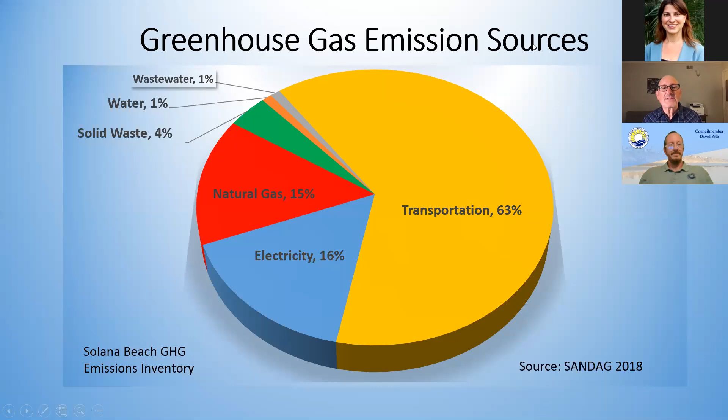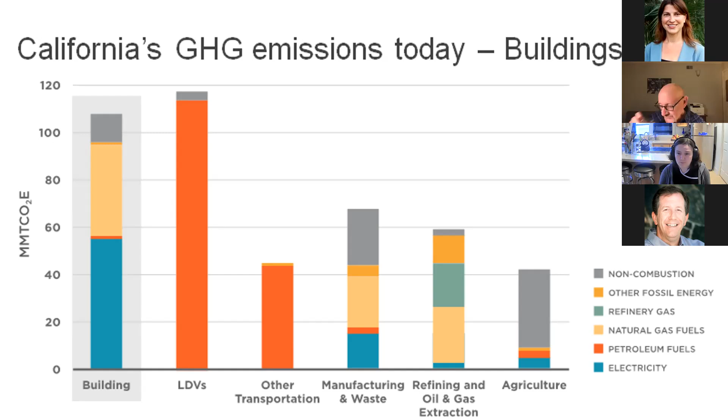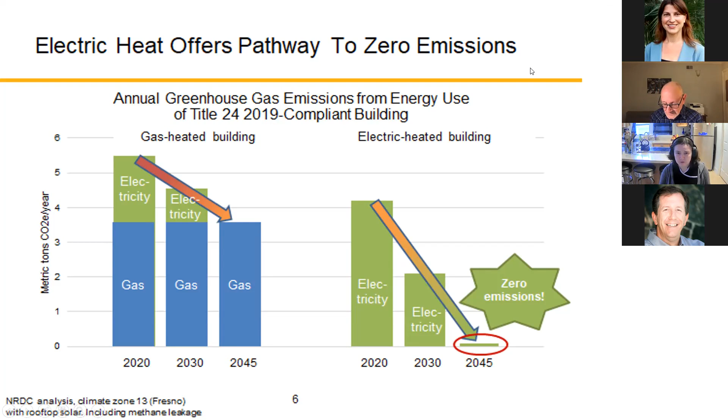I know that there has been some conversation about the opportunity for cleaning up gas, and my next slide is actually intended to talk about that just briefly to give you some context about biogas in particular, or what is also called renewable natural gas. I just wanted to address this, and I'm sure there will be questions as well, but there are some interesting technological fixes for the cleanliness of the natural gas system.

But unfortunately, just in terms of sheer amount of supply, there is not nearly enough to address today's demand. As you can see, if we were to swap out renewable natural gas for our natural gas, we would end up with less than 13% of our total demand. And even with switching out to higher efficiency gas appliances, we just don't have enough of it in state to really fulfill that need. So we generally suggest that we save that renewable natural gas for industries that are hard to electrify. And buildings, as you'll quickly learn here, are not one of those, especially for residential buildings in particular.

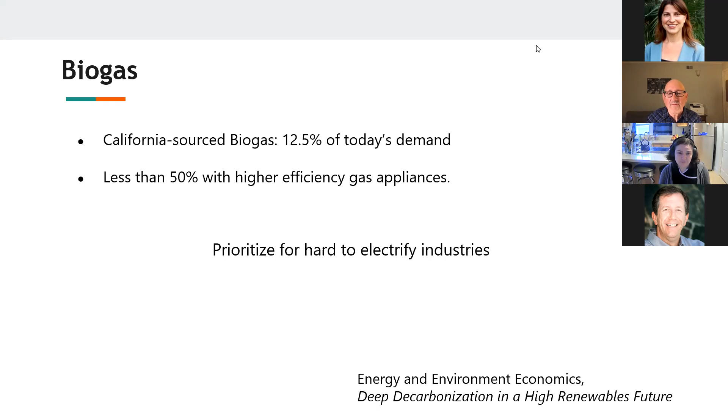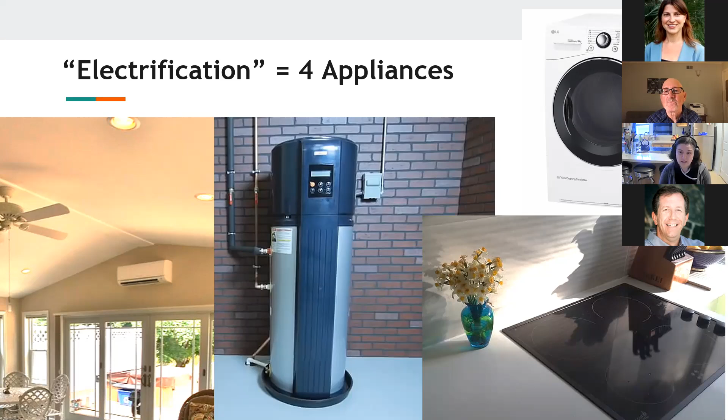So when I talk about building electrification, it really comes down to 4 major appliances in residential applications. Everything I'm talking about here mostly relates to new construction, just to be clear. It doesn't mean you can't take action in existing homes today, but the target for most of our efforts is around new construction, at least for this conversation. And those 4 appliances are your dryer, your water heater, your furnace or air conditioning unit—this device on the far left here is a heat pump, and it does both heat and cool—and then cooking. So those are really the primary targets when we talk about building electrification, and Nick will be diving into some more detail about each of those.

So what are the benefits of this zero emission building, or this building electrification? There's lots, which is part of the challenge when we talk about this—it's multifaceted. They are definitely cheaper to build, which is why the focus on new construction, and for most people they're cheaper to operate as well. They're healthier, more climate friendly, which is certainly the framework that seems most important to Solana Beach, but safety matters too. So all of those are benefits around electrification.

So to talk for a moment about affordability, there's a couple of elements to this. Most prominently in new construction, the avoidance of installing the natural gas piping to a new home, and especially to a new development, can save quite a bit of initial construction costs because you're avoiding that piping altogether. We have a range here as presented from a couple of different studies of how much that can save in initial construction, $1,500 to $6,000 in cost.

And then residents over the course of a 20-year life cycle are also showing a cost savings, even before solar, which in new construction in the state of California is required. So that further lowers the bill over the life cycle of a new building. And then, as kind of an added bonus, it protects against what we're expecting will be large increases in price for the gas delivered to your homes. We're already seeing approved rate hikes across the board from various gas utilities, and they're on track to be 3 times faster growth in the natural gas pricing sector.

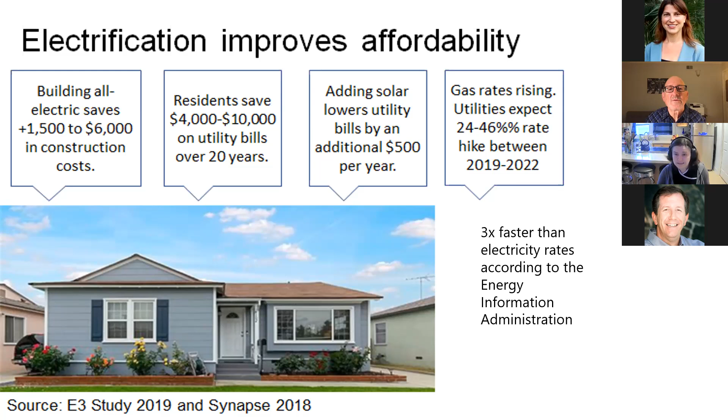And then talking about the outside air as well, the air quality is absolutely impacted by burning gas in homes, which is one thing that completely startled me when I first read it: light duty vehicles are actually on par in terms of their contribution to outdoor air quality with buildings. It's very close compared to power plants, simply because even our natural gas burning plants are so much cleaner—they are pretty highly regulated, and there are fewer of them, so it's easier to regulate them.

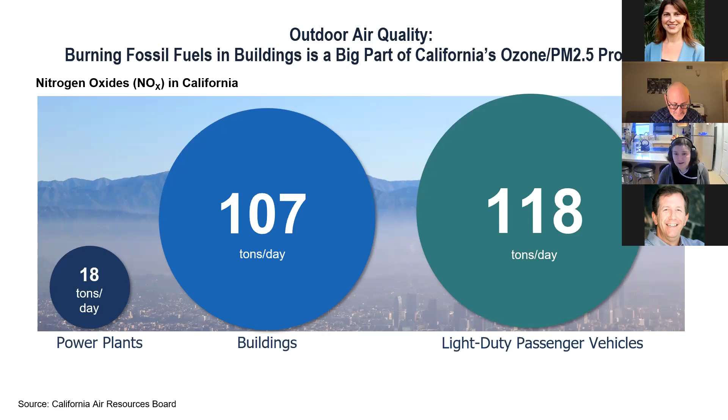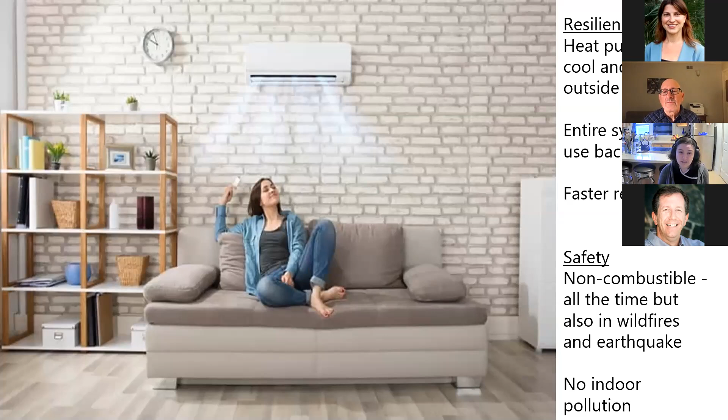And then I don't think we can talk about electricity these days without talking about resiliency. This is just a really important part of the equation, and so a couple of things I'll say about this. One of the things I think about with electric homes is around the ability to back up the whole system with some sort of battery bank, or eventually our cars or something of this nature, and be able to someday have full backup power in the event of short-term power outages, PSPS and otherwise.

Hopefully power outages will be less common in coming days as we harden our electric grid and build resiliency. But there's also other reasons the power might go out. Believe it or not, electricity is faster to restart than the natural gas system. In an earthquake, you're looking at weeks for gas systems to come back up, as opposed to just a couple of days.

One thing to point out from a resiliency perspective: all modern appliances use electricity to start. Some of you may have a pilot light in your water heater at home, so you can have hot water if electricity is out. That's not the case for new construction because pilot lights don't exist anymore—they're all electric starts for safety reasons. So there's no real benefit to having gas in the home during a power outage anymore.

The exception is the gas stove. However, because the fan and ventilation are important for health reasons, you can't run that when electricity is out. So it's a bit of a challenge—we don't want you running a generator in your home without ventilation. Not to mention safety, and the combustibility of gas remains a problem. We can talk about some technologies related to that as well.

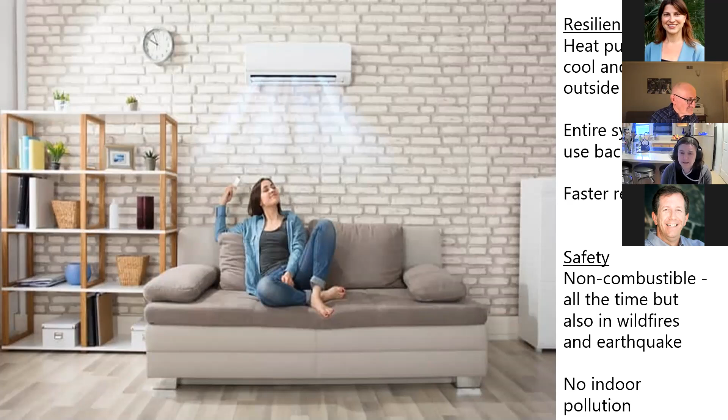If you go to my next slide—I'm an energy consultant broadcasting to you tonight from this house in Long Beach, which I remodeled to be net zero about 6 years ago. And I too was startled, Amy, by that stat you just showed about outdoor pollution from buildings being roughly on par with vehicles.

The stat I wish I knew then, when I remodeled my house, was the one you showed earlier on greenhouse gas emissions. To put it another way, the greenhouse gas emissions today of a new home built to be all-electric are 40% lower than a mixed fuel home that drives those 4 end uses by gas. If I'd known that, I would have made a different decision—I would have chosen to make my building all-electric. Instead, I put in an efficient gas furnace and an efficient gas tankless water heater, thinking those were the best options. I'd make a different decision today.

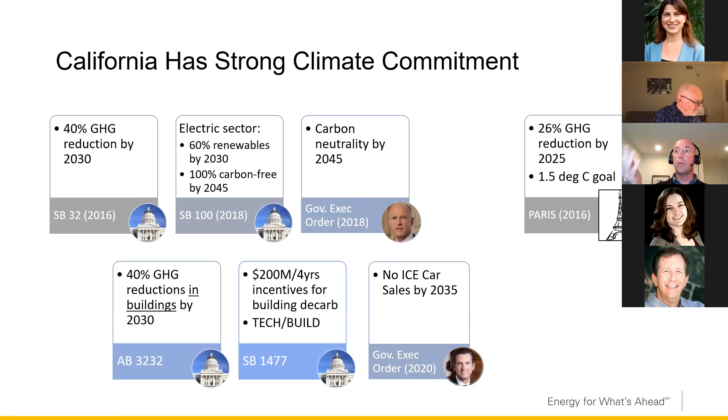Really the only way we meet these goals is by building electric new buildings, and I would say remodeling existing buildings to be electric too—I think that was Lane's point in the Q&A. Next slide.

This is a pie chart showing gas use in California homes. Water heating and space heating are far and away the biggest users of natural gas, accounting for about 86% of the total, with cooking, clothes drying, and other various uses making up the remainder.

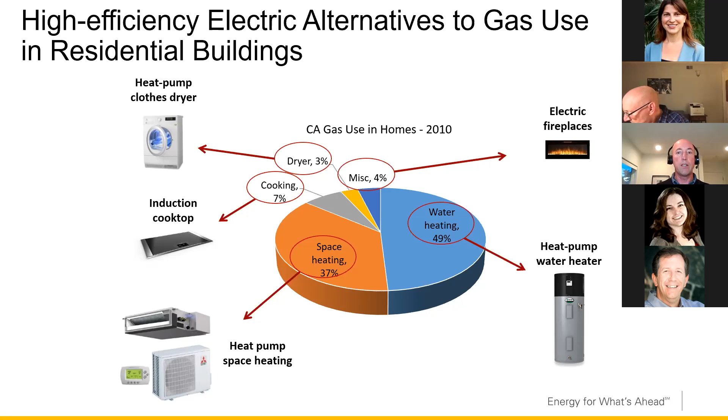We have electric replacements for every single one of these natural gas uses that have significant technical superiorities, are on par in terms of installation costs and operating costs, if not in some cases better than the gas equivalents. So I'm going to highlight those for you here in this middle section of the presentation before I hand it back to Amy. Next slide.

Let's start with the biggest slice of the pie, which is heating and cooling, and that's accomplished with electric heat pumps.

If you're like me, growing up you didn't think much about that outdoor cube sitting in your backyard. You thought of it as your air conditioner, and I always thought that air conditioner magically blew cold air into my house. It's not true. When we're cooling our homes, we're actually rejecting the heat out of them.

This is what's shown in the left picture. Whether you're doing it with a regular air conditioner or a heat pump, the refrigerant moves in those little copper tubes between the outdoor unit and the indoor unit, taking heat out of our space continuously. That outdoor unit is just a fan that expels it using the compressor cycle. Then that spent refrigerant goes back in and it's cooler, and that's how we cool our spaces.

Now, heat pumps are reversible. So in winter heating season, they do the opposite. They take all the ambient heat in the outdoor environment, compress it down using the compressor cycle, concentrate it in effect in the refrigerant, pump that into the house, and now we're blowing hot air into the house and taking cold air back outside.

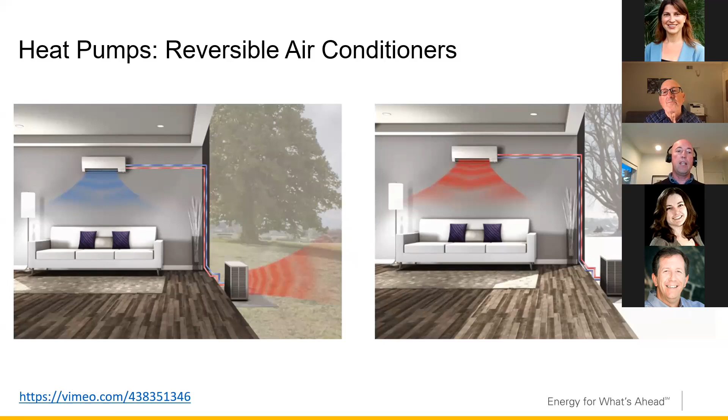So heat pumps are basically reversible air conditioners. They're nothing that exotic. You have heat pumps in your refrigerators and many other kitchen systems. As the next slide will show, they're really more elegant in a lot of ways than the way we've traditionally heated and cooled our California homes.

The upper left diagram is an attempt to recreate the status quo, a traditional conventional gas furnace combined with an air conditioner with a big system of ductwork distributing that heating and cooling through air. You'll notice that system looks a whole lot more complicated than the picture below it, a ductless mini split heat pump system. That's really what this slide is trying to convey.

We've gotten really good as an HVAC industry at executing this very complex system. But because it's complex, there are savings to be had from going to a simpler, more modern technology of a heat pump. You'll notice there's no flue pipe in the heat pump scenarios 2, 3, and 4, and no gas line. In some cases, the ductless mini split for instance, there's no ductwork at all. We're just moving heat with the refrigerant lines, and everything gets done by the indoor unit.

Numbers 2 and 4 on the right show duct-based, air-based means of accomplishing the same thing, all-electric heating and cooling using the reversible system. By using 2 and 4, we're able to get traditional aesthetics, the normal way of heating and cooling our homes, while still getting, to some degree, the efficiency of the heat pumps.

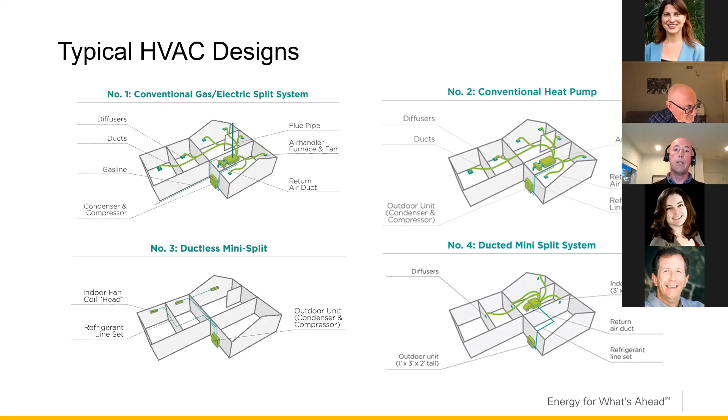The difference between 2 and 4 is a mini split system, whether it's 3 or 4, modulates the delivery of heating and cooling up and down according to the load. It's like a variable approach to it. Whereas the heating and cooling systems we've all grown used to, they're on or they're off like a jet engine, right? We're used to them cycling. A lot of the efficiency in these advanced heat pumps, mini splits, comes from that modulating and being able to only deliver the heating and cooling that's needed at the time and just manage temperature set point consistently.

Next slide. Here's a cutaway showing the traditional mini split heat pump system. It consists of an indoor unit and an outdoor unit connected by refrigerant lines run invisibly through the walls. Those are the same refrigerant lines that connect your outdoor air conditioner with your indoor air handler today. The indoor unit contains a small fan, continuously filtering the indoor air as it comes in, and delivering heating or cooling depending on the season. So there's no energy loss from ductwork.

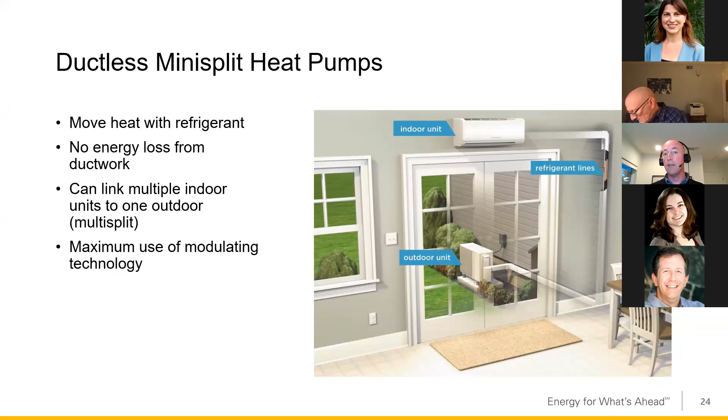They're much more efficient. As I said, they're inverter driven, so they modulate the delivery to the demand, which makes them a lot more efficient.

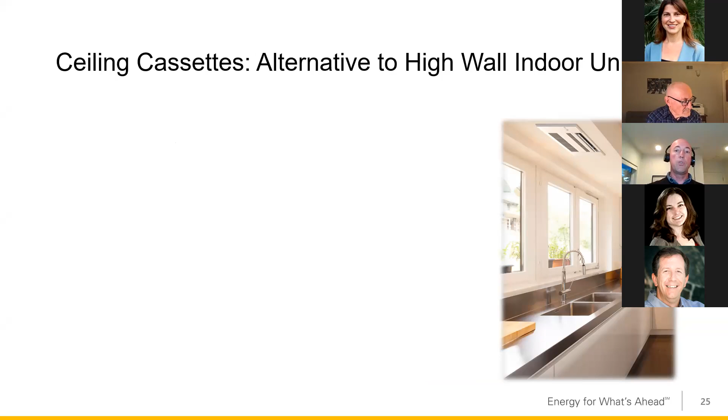But that's not the only way to take advantage of these more efficient systems. Ceiling cassettes provide very attractive aesthetics without a high wall unit, and the same efficiency gains with no duct losses. Both units are connected with refrigerant lines to outdoor units, just like in the prior slide, but all the mechanics are hidden up in the drop ceiling. Very contemporary. These are residential versions of cassettes that used to be commercial-building-only and much larger. They're very clean to look at, very efficient and comfortable.

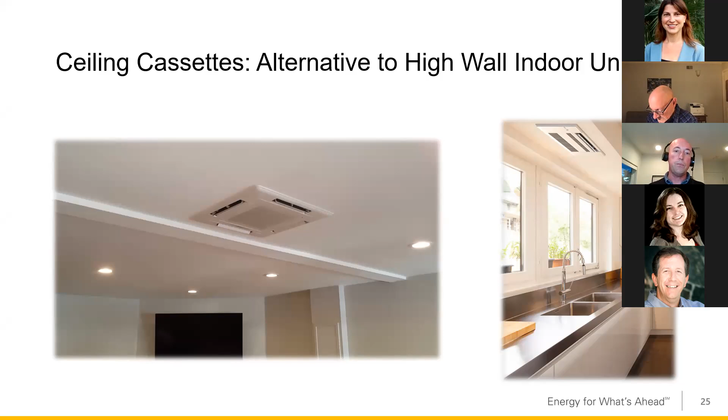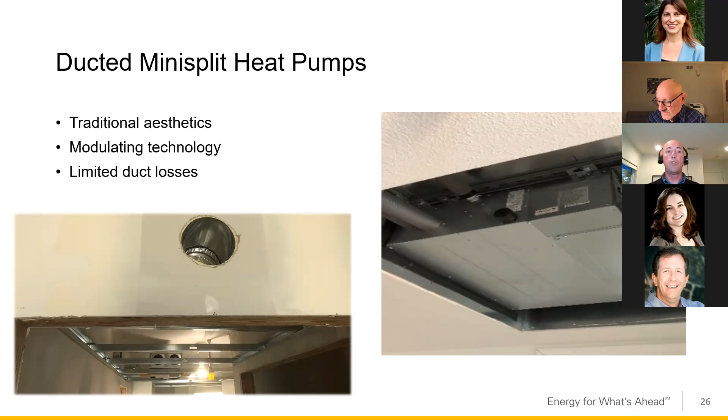The next option is a ducted option—a ducted mini split, behind the scenes, under the hood. The same mechanics you saw on the high wall unit are accomplished in this galvanized metal version hidden behind a drop ceiling. It can also be put in an attic, although we recommend putting it on the conditioned side of the thermal boundary for efficiency reasons. The ductwork just takes short runs, so you can often accomplish this in small footprints, with 3 or 4 short duct runs to bedrooms, bathrooms, and living rooms. You avoid having that octopus up in the attic where you're losing a lot of heating and cooling. Studies show old duct systems often leak 30% up there, which does you no good.

So these are a great option, giving traditional aesthetics, like this linear diffuser—very clean, contemporary looking. I think it would belong in many of Solana Beach's finest homes. It's got a ducted mini split behind it, or it could be a central heat pump up in the attic. So aesthetic reasons are not the reasons to avoid heat pumps.

They're extremely efficient. Also, when you have indoor units—cassettes or high wall units—each one can have a different temperature set point. So if you have one in the office, it can have a different schedule and temperature than your living area or sleeping area. That's just one of many technical superiorities over the traditional central ducted system we're used to.

If you're in multifamily or hotel/motel, they make package units that go through the wall just like your PTACs, but they're heat pumps and extremely efficient. So we have solutions there as well.

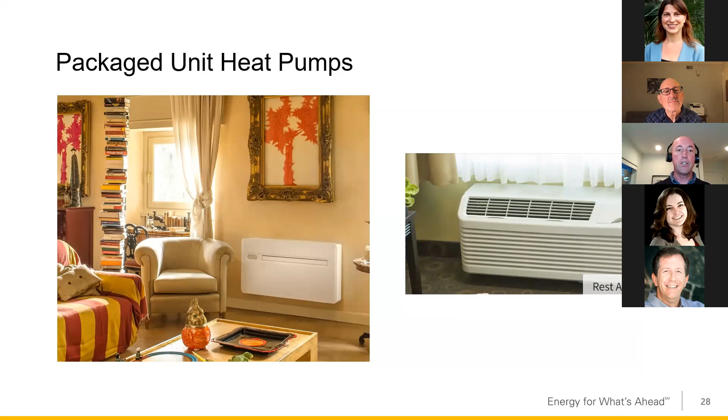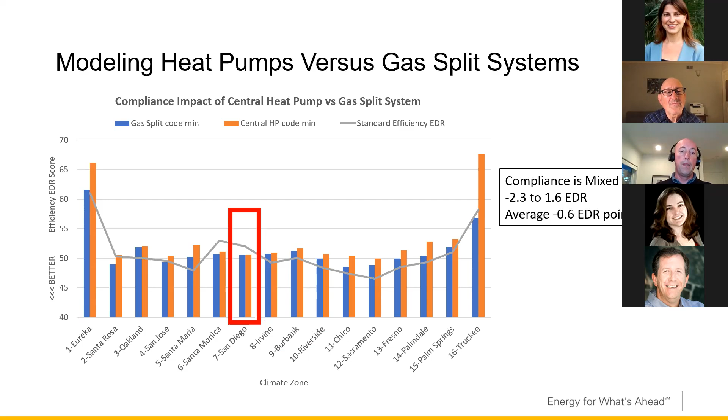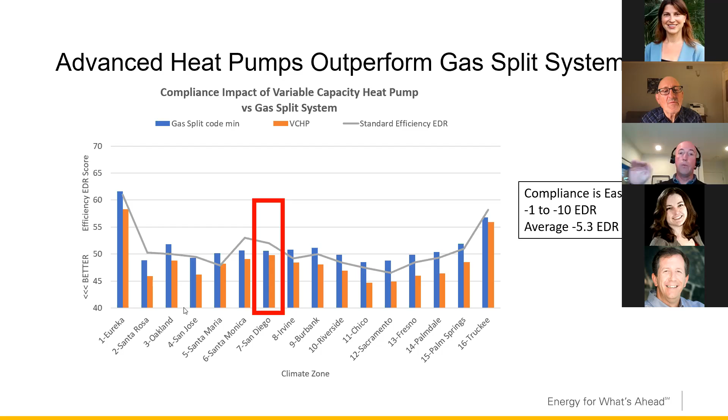Furthermore, I looked at your rate structure—you guys are heating your homes with 3-cent kilowatt hours all winter. Compare that to what PG&E and Edison ratepayers pay, which is 6 to 7 times that much. Even there, when I run the numbers, there are cost savings from switching from a gas furnace split system to a heat pump. So I imagine when I run the numbers in your territory, comparing regular retail gas rates to your CCA electricity rates, you're going to come out ahead.

All right, next, the rest of the house. Let's talk about water heating, clothes drying, and cooking.

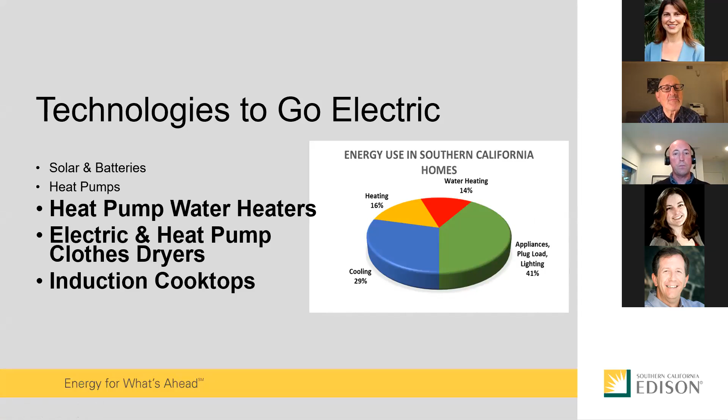First, the water heater. Remember, this was the other big end use, the big energy user. And we have great electric options for these too. As you can see in the picture, the condensing unit is on top of the tank. They come in 50, 65, and 80 gallon tank units, even 40. And they're less expensive to install, operate, and maintain. No flushing the lines like gas tankless. They have efficiency ratings of 300 to 400%.

How do they do that? That just doesn't sound real world, right? Well, because they're taking that ambient heat around them and compressing it into the tank. And as a result, they vent off the cool air, which often can be a pleasant environment to have your workbench next to, let's say, if this is in your garage. So there are some side benefits that we can use with the heat pump water heater that are kind of nice too.

They're also high tech, right? They've got controllable set points on that panel there. You can put it in vacation mode when you go on vacation. I mean, these are things we can't do with our regular water heaters, be they gas or electric. So super efficient. And let's not ignore they store fresh water for just in case the terrible happens. And our gas tankless water heaters don't do that.

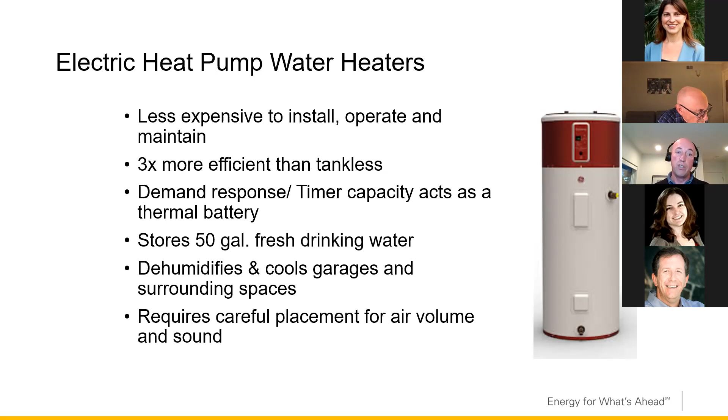We do need to think about where we put them. They're best in a garage, an outdoor closet, even an outdoor lean-to. You don't want them in your master bedroom closet, right? They make a little noise when they're creating hot water, but nothing more than your dishwasher or fridge. So it's within reason. Just need to be careful.

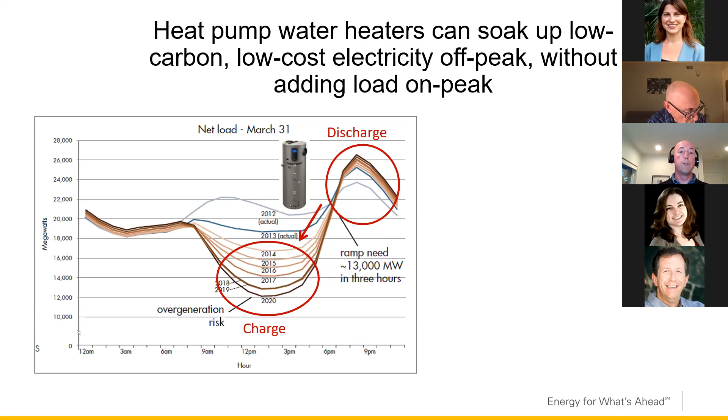And next slide, press the button. And in Sacramento, SMUD has a really new innovative program that pays people with heat pump water heaters $150 to install them in such a way that they help with that late afternoon ramp, and even pays them $2 a month. So these type of programs are coming to other utilities soon as well.

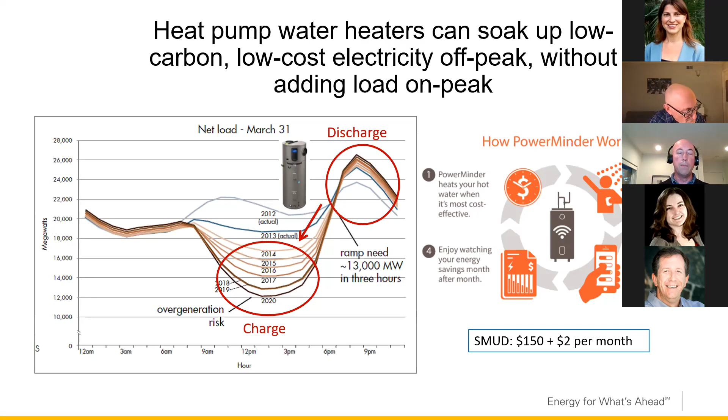Next. And when I model heat pump water heaters, similarly in your climate zone, they outperform gas tankless. When I look at utility costs, they're roughly a wash in the retail utility areas. So I can only imagine you're going to be ahead in climate zone 7, especially with all that warm air that you have year round.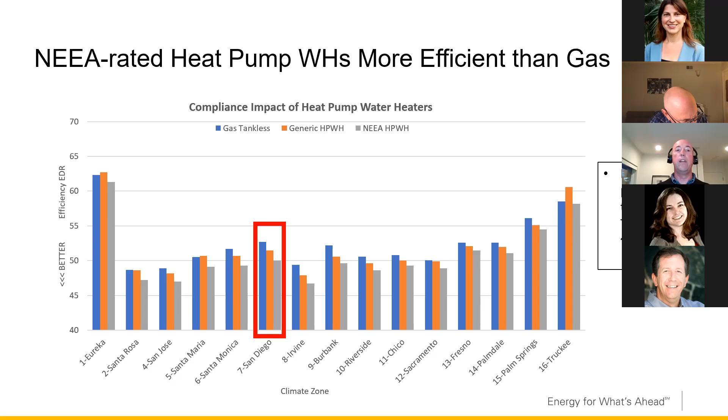Next. Now, here are some of the counterpoints you'll hear on heat pumps. They come with electric resistance heat strips, and that's where you lose all your gains on the heat pumps. Well, not in Southern California. Our heat pumps don't need heat strips to keep the temperature set points in winter. We have a very mild climate, and they've come a long way since early models did require heat strips to keep up in the Sierras or somewhere like that. Keep in mind, Arctic buildings use heat pumps. They don't have natural gas up there. Minnesota does, Northern California, etc.

Heat pump clothes dryers. I just installed one of these here because my gas one gave up the ghost in just 5 years. Couldn't be happier with it. It's a little bit more money up front, but I find much less lint on the filter. It's gentler on the clothes because it's using a much lower temperature set point.

And heat pump water heaters, they have a resistance heat strip in there too that kicks in if it's Thanksgiving and you've got 6 family members and you're having some unusual load on the heat pump water heater. I see that as a feature, not a drawback. You want that ability to recover quicker, once or twice a year. And you can set your unit to run only in eco mode, or you can set it to run like that. So you have the control. So I think all these arguments are easily argued away.

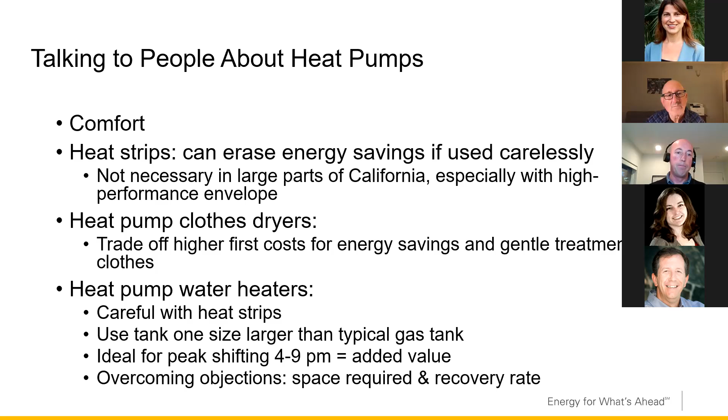Next. Couple more slides. Cooking. I put in an induction cooktop, couldn't be happier with it. And this study by SMUD finds really the preference for gas cooking is something that seems not real. It's based on people never having tried induction cooking, because they found 80% of people had a negative view of induction cooking before trying it, and 90% of those people had a positive view of induction cooking after trying it.

Which leads me into Peter's new program that he's going to introduce here in a minute to test induction cooking for yourself. I encourage you to do that. Next.

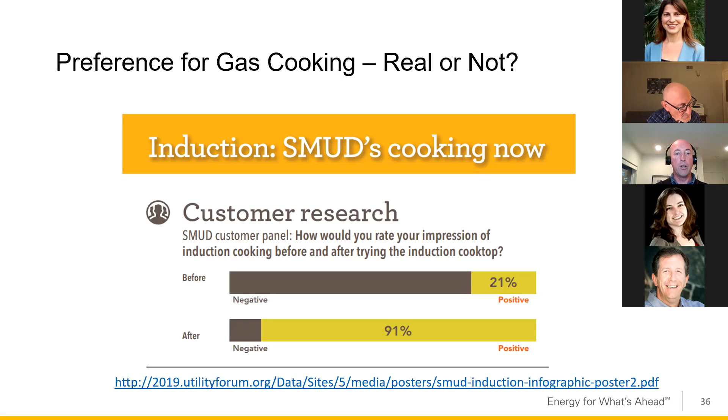So they work by heating up the cookware, not the air around it. No gas combustion byproducts, which Amy touched on. And your kids can reach over the edge of that countertop and touch the glass surface and not be afraid of burning themselves. Even the tops of the pans and pots sometimes I find are cool to the touch. It's just a lot more safe way to cook and quicker. It boils water so fast.

The digital controls, I think, appeal to people who are used to digital watches and digital controls elsewhere. So this is not something to be feared. Next. A lot of great models out there, affordable too. Next.

Oh, and here's the heat pump clothes dryer. I get a lot of questions on this because it's a closed loop, it doesn't require a vent to the outside, right? We're used to our dryers blowing the moist air out through that little duct. Well, these don't. What they do is they heat up the air to a lower temperature set point. Yes, they circulate it the same way through the drum, but instead of blowing that moist air out, they condense the moisture out of it and pump that water down the drain, just like your washer goes down the drain.

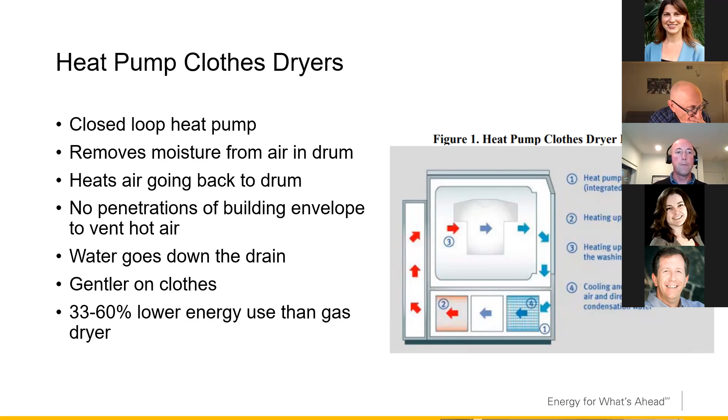So really helpful when you have a landlocked dryer stall and you can't get to an exterior wall to vent it. As I said before, gentler on the clothes because it dries at a lower temperature. Yes, it adds 10 minutes to the cycle time, but that's no big deal. And I've found it really energy efficient too. Next. Oh, there it is. You see, I stacked it on the old LG. Next.

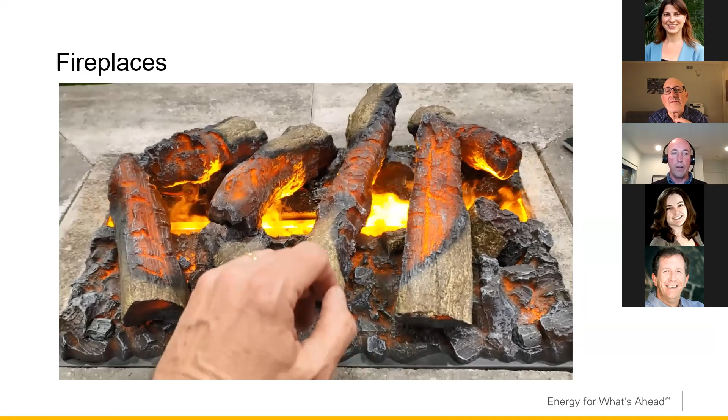Even fireplaces have solutions today, and this was taken at a trade show. You can see this roaring fire. And my friend reached out and touched it real quick, and then realized, wait a minute, that's not hot at all. It's a complete illusion using water vapor and LEDs. So innovative companies are coming up with solutions to all of the traditional gas uses in our homes. And I would recommend an outdoor gas grill just in case you need it.

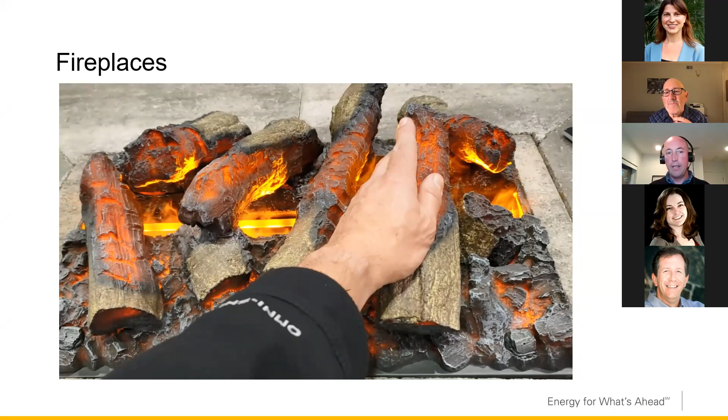Great, thank you so much, Nick. That's a fantastic overview of the technologies, and it's pretty fun, actually. And just in case you're wondering, yes, it's induction. It's right behind me. So my 9-year-old thinks it's the best thing ever because she can safely cook on it on a daily basis.

So I want to turn now just briefly to some of that larger point that Nick made around what local governments are doing, and just to give you some context for what some potential opportunities might be for Solana Beach, and to talk about how that affects the rest of the state, frankly. So just a quick overview here of some local government things. For those of you less familiar with energy, the state of California has an energy code, which we call currently the 2019 code, that went into effect in 2020.

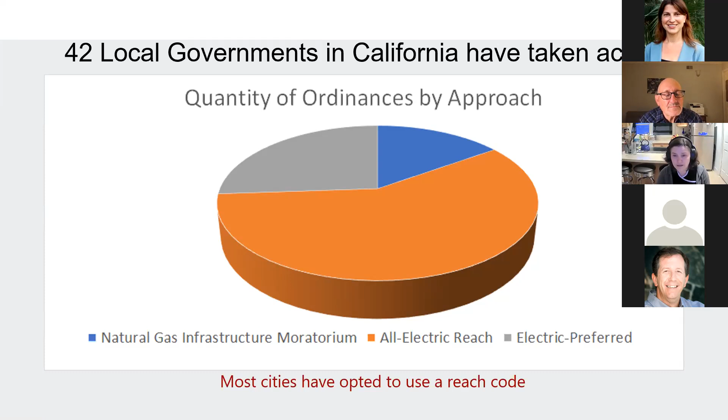The second popular option is the electric preferred, which starts to send a market mechanism to builders that they can have the option, but have a preference for electrification by making it a little bit easier to comply with the building code. And then the most popular by far is the all-electric REACH code, which is effectively saying that you can no longer build with natural gas, either for all appliances or for some of the appliances.

And on the next slide, it gives you a little bit more detail as to how this works, because there's a number of opportunities. Local governments can use that energy code as a baseline, but they can also use the health and safety code. And there's lots of complexity here that we don't need to get into, but just wanted to point out there are different requirements for each of these, and they're all potential options that can be up for consideration or discussion at any individual city, including yours.